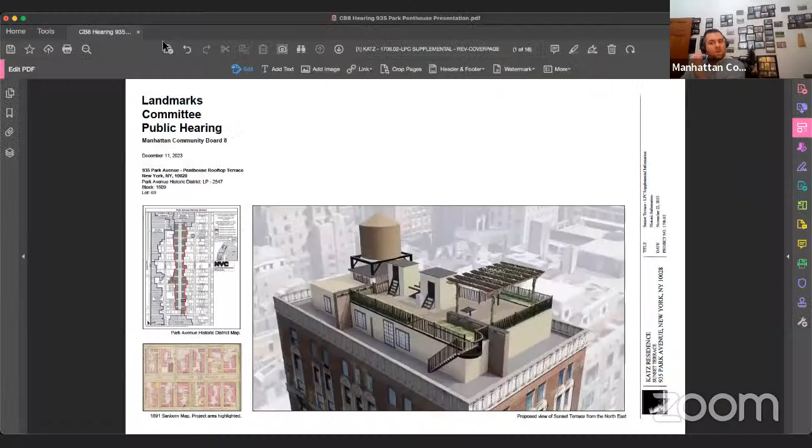Can everybody see? Yes, we can. Thank you, great, thank you. And thank you for your punctuality and precision in getting the meeting underway. We're happy to be back in front of you. I'm Walter Sedovic, the principal of Walter Sedovic Architects.

I'm joined by my partner, Jill Gotthelf. I'll be doing the speaking principally this evening, and we're here representing the owners of the penthouse of 935 Park Avenue, Mr. and Mrs. Katz, Philip and Nancy. I want to start out with a contextual statement.

This is the pergola in its presented proposed form. The simple comment that terraces like this lend a garden effect to the overall design of buildings that front Park Avenue and other avenues like it. You don't have to take my word for that. I'm paraphrasing a quote that appeared in the Herald Tribune in 1930 by the principal of an architectural firm, Schwartz and Gross.

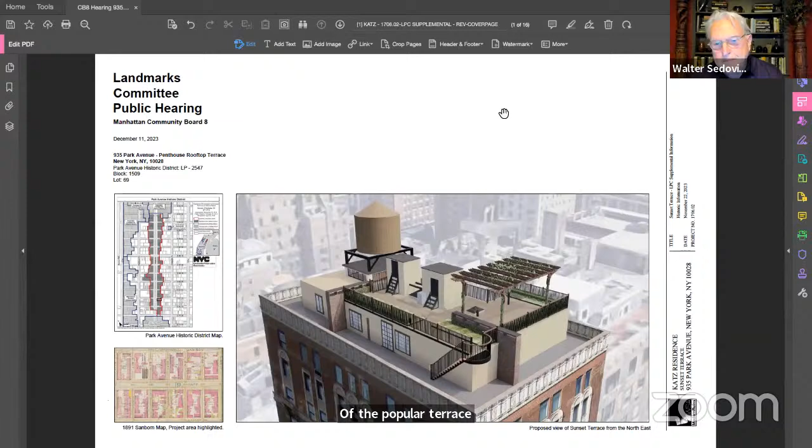That principal, Arthur Gross, made several comments about a law just emerging at that time. In essence, he said that this new law enables us to provide a greater number of setbacks and more expansive use of the popular terrace style of construction on Park Avenue and the avenues fronting Central Park.

These terraces originally were intended to be leafy havens for city dwellers, in keeping with the overarching design ideals that would define singular New York City neighborhoods like Park Avenue, and currently its historic district, that were emerging in the 1920s and 1930s. That is, this form of building enhances the original DNA of Park Avenue.

And there's his quote. The article appears here for your own reading.

In 1891, the most current Sanborn map predating the building, the site is indicated as an open lot. The building, as noted in your summary for this agenda, was constructed in 1923 to 1924 and completed then. It's a majestic building at the corner of 81st and Park Avenue, a phenomenal bookend for this block of buildings.

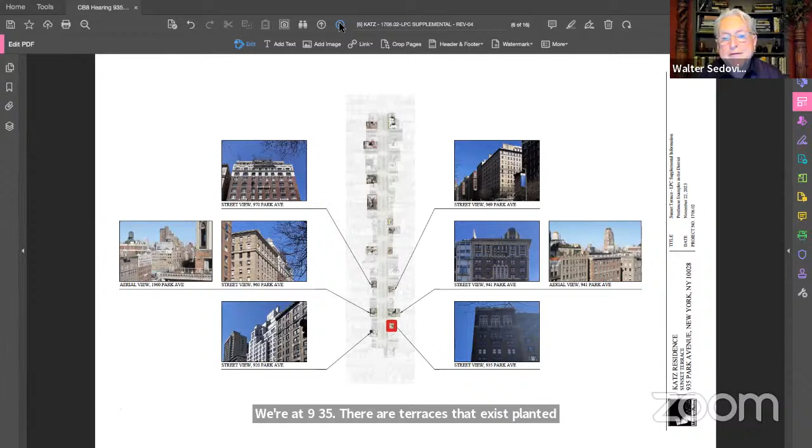however subtle it is. There are numerous terraces up and down Park Avenue, but on our block alone, we're at 935. There are planted terraces that exist at 969 Park Avenue, 941 on the other side of the street, at 930 Park, 960, and also 970.

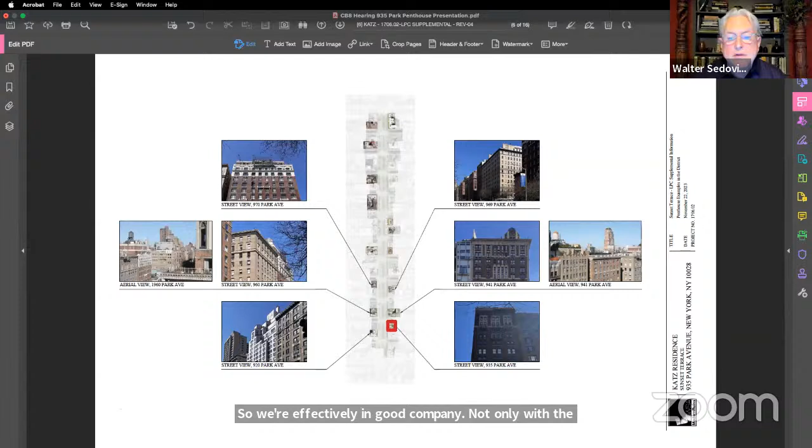So we're effectively in good company, not only with the development of this planted pergola and terrace, but with its scale and mode.

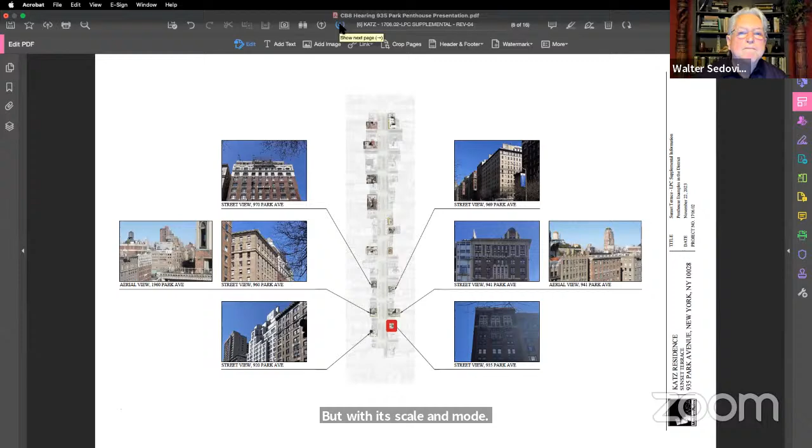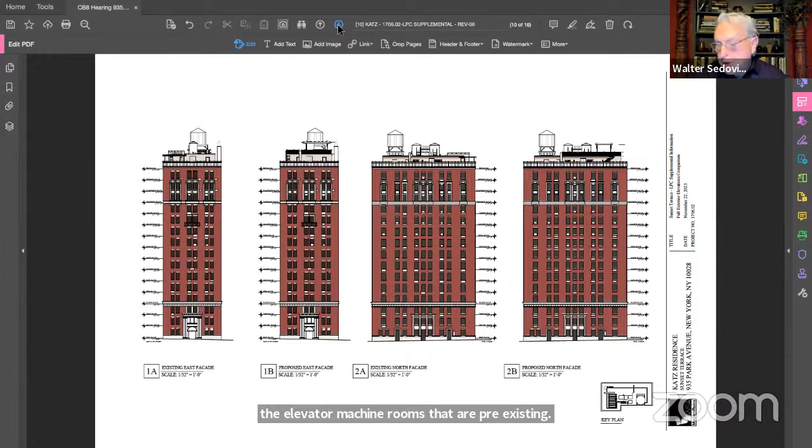On the north facade, similarly, we show the water tower, the elevator machine rooms that are pre-existing, and the interposition of a new rail and the pergola in the upper right in the last view.

These are views from the secondary facades, the west and the south, which are not inconsequential, but you really can't see them from virtually anywhere.

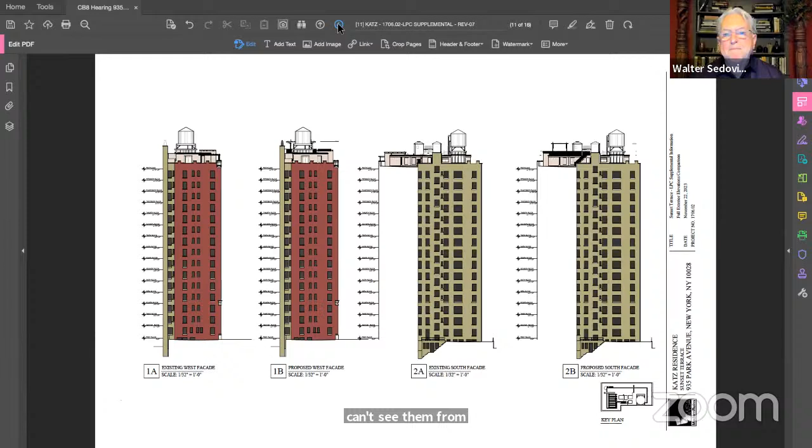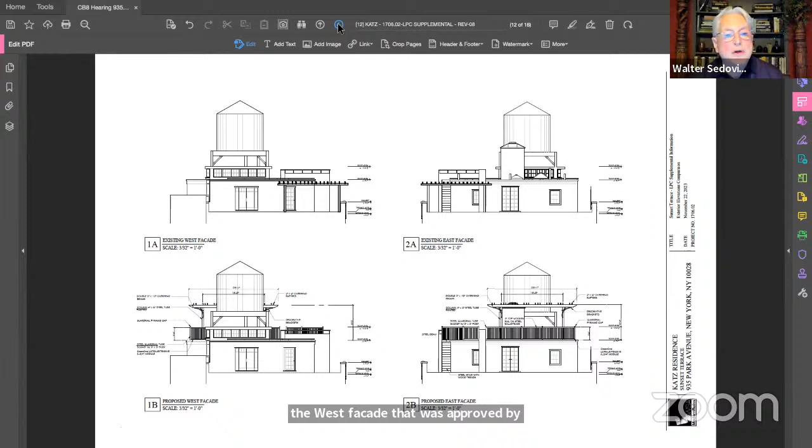And delineated views, a little more detail and closer up, showing the arrangement of the west facade as it exists. And thankfully, we have an extension in the west facade that was approved by this community board a number of years ago that has turned into a very successful and beautiful project.

So the expanded version of the rails on either side, and likewise on the east facade, shows the arrangement on the north facade, which has effectively the pedestrian stair.

On the flip side, we've exchanged a ship's ladder that hugs the wall for a stringer and stair for the specific purpose of maintaining the rooftop equipment. That's separated in essence from the more pedestrian areas of the pergola, which you'll see in a moment.

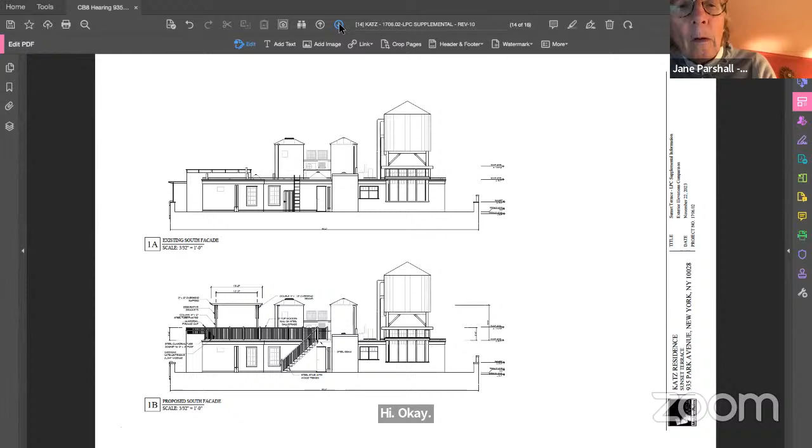I get it. And how high is that rail? 42 inches high, and the balusters are at 4 inches on center. Those two dimensions are regulated for safety purposes, so that a child's head can't get stuck between the balusters. And the pergola itself, the height to the underside is 10 feet.

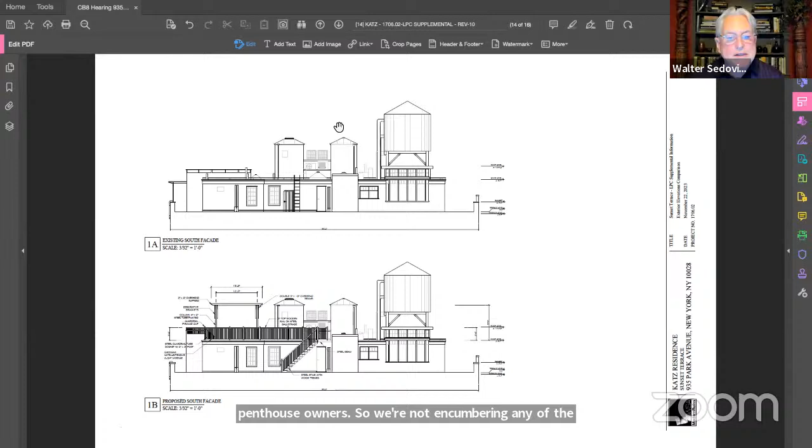And the pergola is going to be on the new terrace, which is formerly the roof. That's correct. And the roof is under the jurisdiction of the penthouse owners, so we're not encumbering any other real estate relative to the building on the whole. This is all part and parcel to the penthouse. And it lands on the existing terrace, which also belongs solely to the penthouse. But right now, that proposed new terrace is actually part of the roof of the building, and the penthouse owner owns that part of the roof. That's correct.

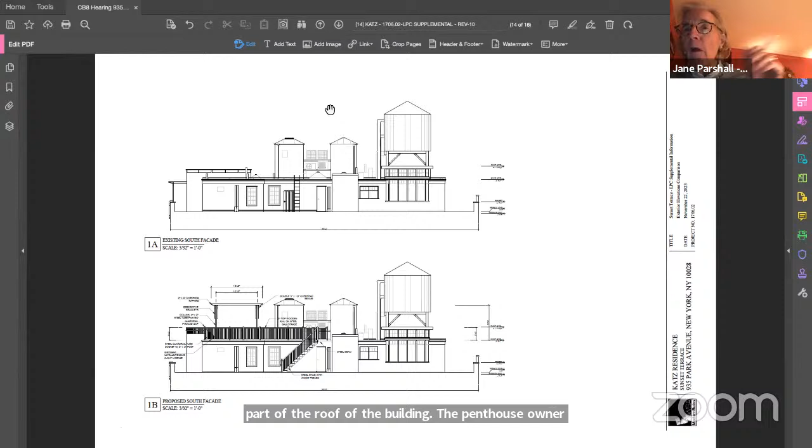And the pergola, what are the dimensions of the pergola? Oh, I see it right there. It's approximately 12 feet wide and 16 feet deep, about 10 feet high to the underside... just to backtrack, it's 12 feet high times 12 feet wide, by approximately 16 feet deep, and about 10 feet to the underside of the cross members.

So it's 10 feet high. Yes, okay. Got it.

The rail elements are all steel. The columns for the pergola are steel, to ensure fireproof construction at this level. The cross beams and purlins are wood. The top rail is wood, and the stair treads are wood, although the stringer for the stair treads is steel. So it's a very simple affair in terms of its component parts, very much in keeping with the vocabulary for the rest of the building.

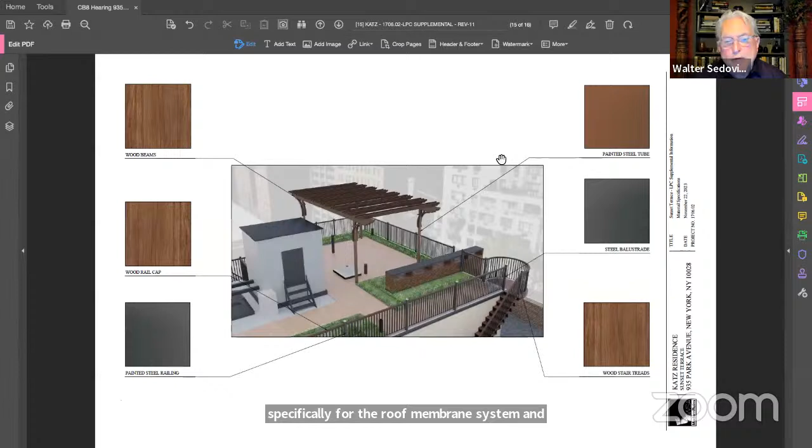The overlay you're looking at, we're providing a new roof membrane for the entirety of the penthouse. These are panelized systems designed specifically for the roof membrane system, and a sedum roof - not grass or anything that has to be cut or manicured, but a sedum mat that's rolled out, lightweight but anchored to the roof. It does several things at once.

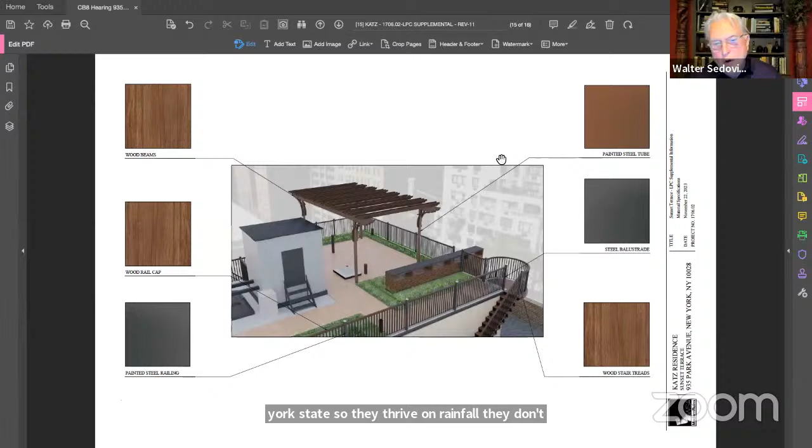The plantings within the sedum mat are indigenous plants to New York State, so they thrive on rainfall. They don't require any fertilizer or additional watering. They lower the temperature of the solar gain on the building, so they're a very fine benefit for heat reduction and enhanced energy performance. And they provide a pretty relief area for people walking up on that area.

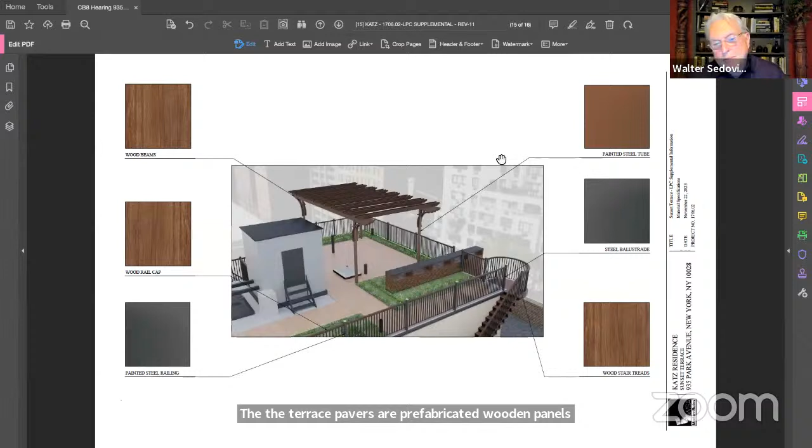The terrace pavers are prefabricated wooden panels that produce the walking paths, and that's effectively it in terms of the materials. Everything grayed out is pre-existing, and this is the arrangement from every view shed.

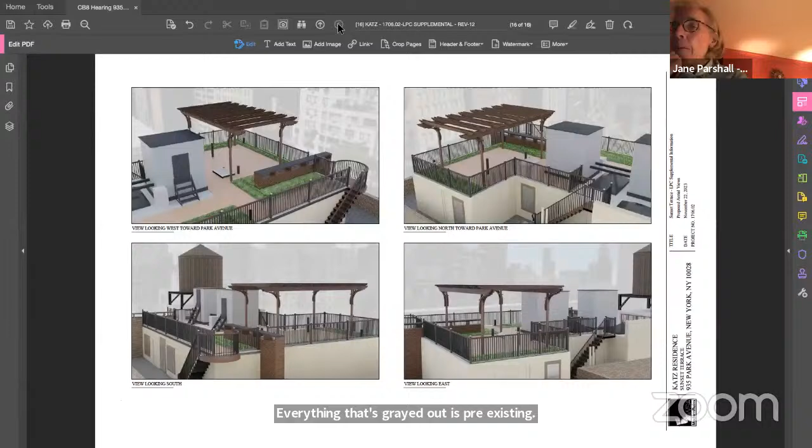Again, sorry to interrupt. Could you just give us the dimensions of the terrace? It does look like it's sort of an L-shaped terrace, is that correct? Yeah, let me go back and show you the plan.

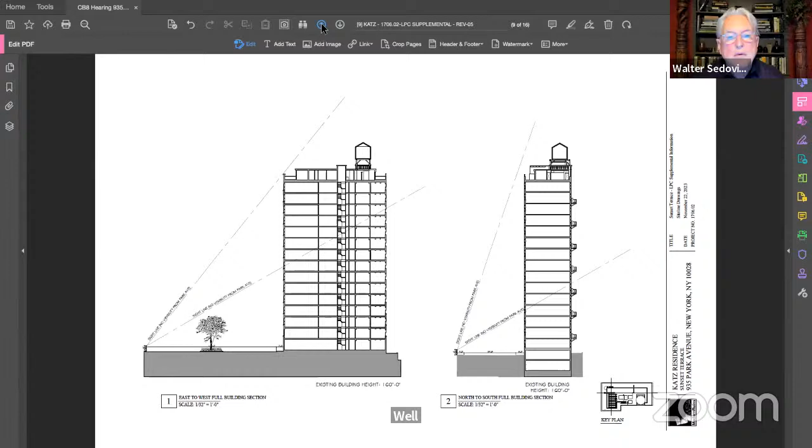That's it. It is L-shaped, all of which currently exists. We're not modifying this in any way. You aren't changing the footprint at all, is that what you're saying? Not one bit. No, the water tower exists - it has always existed in that location.

These are the mechanical machine rooms for the passenger and service elevators, and all other elements of the roof are staying exactly as they currently are, except for that part that will now become a garden terrace. And what are the dimensions of the garden terrace part of the existing rooftop, the proposed garden terrace that will take some of the existing roof to be created?

The areas beyond the pergola to the east and west extend approximately 4 feet, making it about 20 feet from point to point in terms of the rail, east to west. It extends about 4 feet to the south beyond the columns of the pergola, and about 10 feet to the north overall. So it's positioned so there's enough area to comfortably walk around, a gathering space generally oriented to the west for sunsets, although that's not its exclusive purpose.

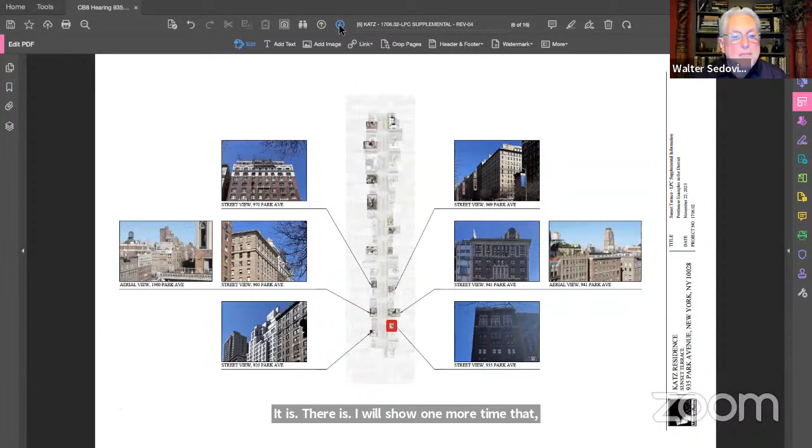And is that your presentation? It is. There is one more thing I'll show. While we don't always seek to make projects like this invisible, it is in fact not visible from the street, with one tiny exception I'll show you. The pre-existing pergola in the northwest corner is being removed. Our pergola is here but can't be seen. I'll show you the one exception where it is somewhat visible, right here. You can see it in our mock-up.

But from the street in the vicinity of the building, it's entirely not visible, only to residents of the penthouse. So it's minimally visible from which point? It's not visible from any point except about a block plus, where you can see the street sign for 80th Street. We're a little south of 80th Street, and it's minimally visible right there, just a little corner of it. Everything else, from every other vantage point, it is not visible at all.

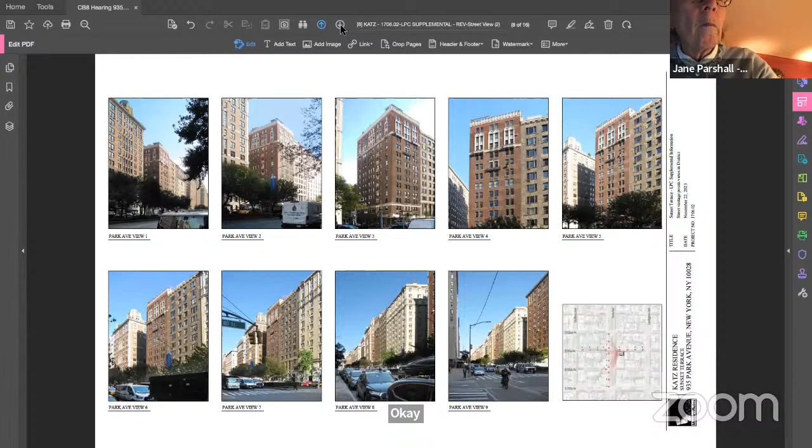Is that your presentation? It is. Okay, very good. Will, could you just check to see whether any members of the public are here?

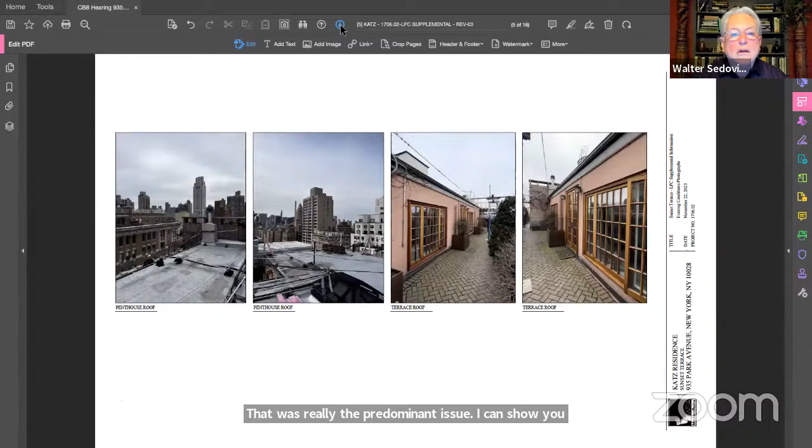I can show you again the location where it's marginally visible, right there. I thought you said that was south of 80th Street. It is south of 80th Street. Okay, thank you, so it's not 81st Street. I thought this was the view from 81. No, that's from below 80th Street - it's about a third of the way down the block between 79th and 80th. Oh, okay, yeah, so it's the south end of the building towards Park Avenue. That's correct, yeah.

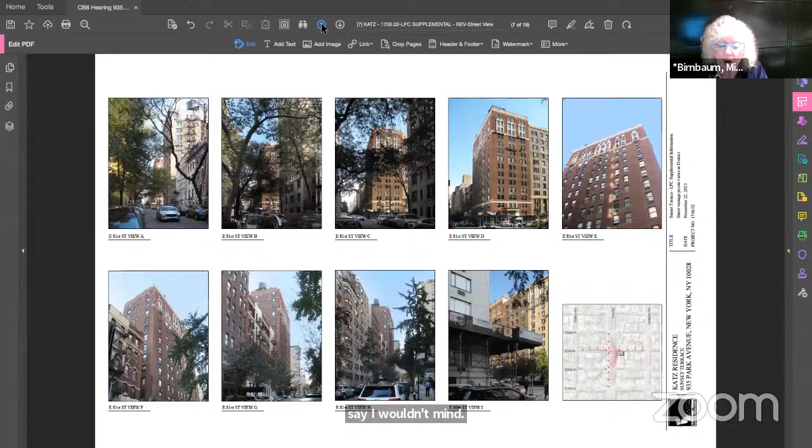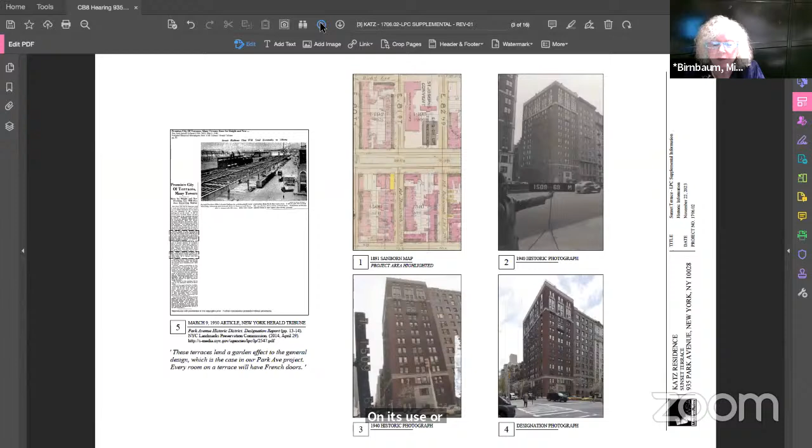I don't have a real objection to it, but I have to say I wouldn't mind - 10 feet is rather high. And if it went to 8 or 9 feet, I don't think it would have a negative impact on its use or aesthetics as viewed from the roof itself, and yet it would bring it down a couple of feet to make it less visible. In the state that it is now, where it is very, very sparsely planted, that probably will not be the case as the years go by. I imagine this will be covered with ivy, both going up and down the support poles and across the roof, and to that extent, it will present as an almost solid structure. So that being the case, which I believe it will be, I would recommend that this be shorter. I don't know how that's going to affect my vote, but that would be my concern.

I have one other question. The partition that you have between the north end of the pergola's empty space - you have sort of like a low stone ridge or brick ridge, on the other side of which is a grassy-like substance. That looks like it's open. Is that a grill or anything, or just a partition wall? You're very perceptive - that's a pre-existing early flue, but it's largely inactive. But it will remain? Yes. Okay, remain and not be used. Correct. Okay, anyway, that's my suggestion. Thank you very much. Well, thank you very much.

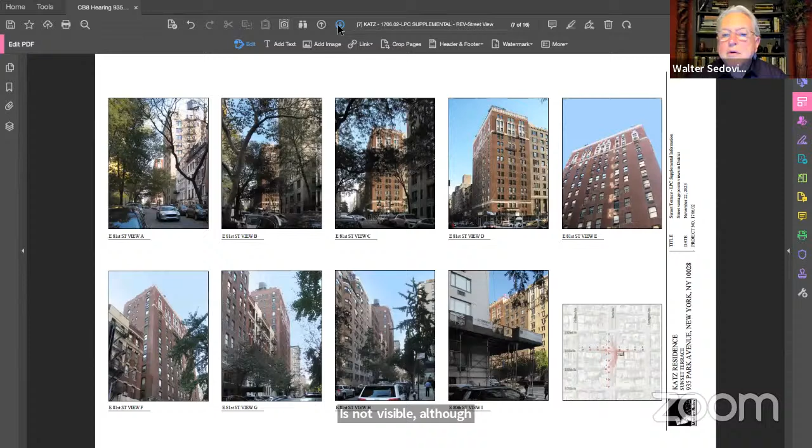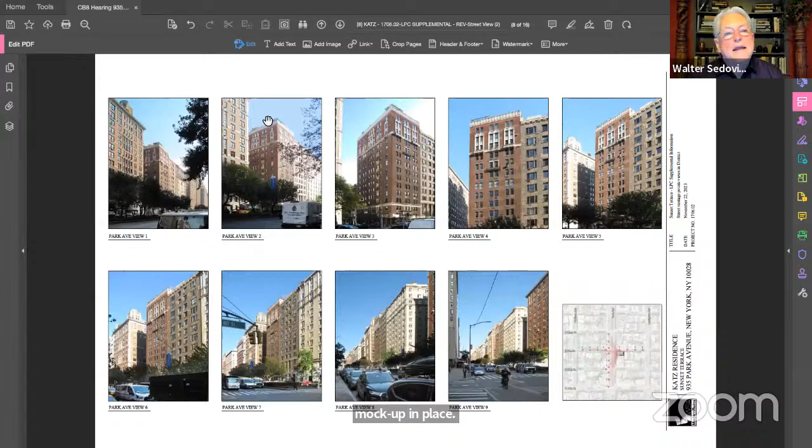Again, what we're looking at in the inside corner is a pre-existing pergola that will be disassembled, but there is nothing else that's visible from that perspective, even several blocks away. The curve of the stair is actually included in the mock-up that's in place right now, so the entire railing is mocked up as well as the pergola.

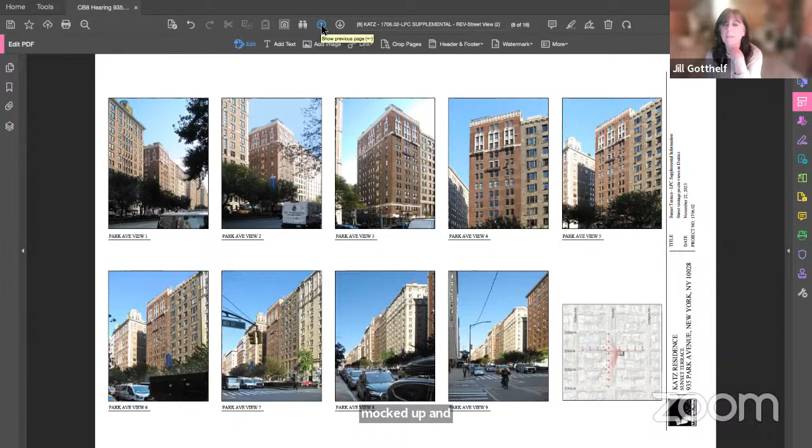Okay, that's the lower line in those places where we can see it. Exactly, the railing is mocked up. Got it. And the pergola. So absolutely everything is mocked up, the full extent of it, so that you could clearly see everything. Okay, thank you.

Alita, did you have a follow-up question? I did, thank you. Is there any chance that when the pre-existing pergola comes down, something would be visible that's not necessarily visible now because it's blocked?

Is there a chance? I would hesitate to say that there is no chance. However, we're not the only set of eyes that were looking at this when the mock-up was in place, and nobody was able to view a glimpse. That is to say, the staff at Landmarks were not able to view a glimpse of that pink frame through the pergola. The pergola wasn't entirely blocking the view.

You could see through it at the time the mock-up was in place. The mock-up is still in place. The pergola right now, the lower pergola, is not heavily planted, so visibility is there.

The top of the pergola aligns with the bottom of the platform of that curved stair coming through, so the existing mock-up of the railing of that curve is above the rooftop of that pergola. So when the pergola comes down, you would see, if you saw anything, it would be the corner of the pre-existing penthouse where the pergola is, because the railing and the curve right now are above the top of the existing pergola and are mocked up above the top of it.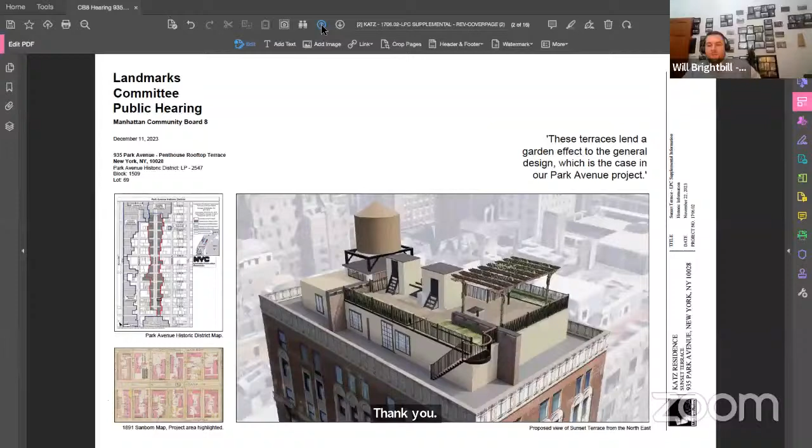Thank you. Thank you for the presentation. Let me start.

Basically, the scope of work is the railing and the relocation of the pergola. It's a very simple application. The problem is that you tried to enhance your presentation and went beyond that, and that probably doesn't help you at all. That's my impression.

How tall is the building, or how many stories? It's 16 stories plus the penthouse. So basically, people start looking 160 or 170 feet up to determine that the pergola is too high. I think that's unfair against you, because at that height it's impossible to determine if the height is well proportioned or not.

However, I'm going to ask the question: what determined the height of the pergola? What was your analysis or point of view to propose 10 feet?

It really came down to proportions of the size of the pergola and the comfort of standing underneath it. At the lower height, when asked to come down to 8 feet to the underside, for a space on a terrace, given the proportions of the pergola and its members, it felt very top heavy and enclosed, as opposed to a pergola, which is supposed to be open to garden and air. Bringing it up to 10 feet proportionately worked with the size of the rafters and the comfort of standing within it. Thank you.

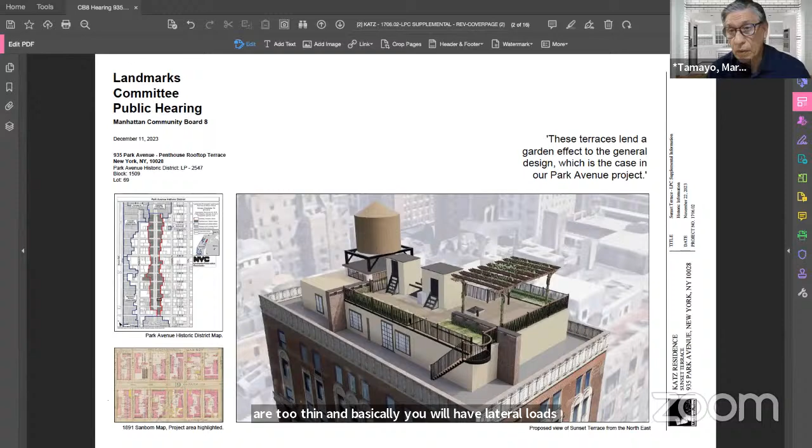I think the only thing I'll comment on, if possible, is just the dimensions of the column. The higher the column, the moment of inertia increases, and basically you have structural problems. Looking at the graphic, these columns look too thin, and you'll have lateral loads to deal with. In any event, you are responsible, it's your decision, it's your design. I find this is a very simple application. I do not have a problem.

Thank you. Thank you, Mr. Tamayo.

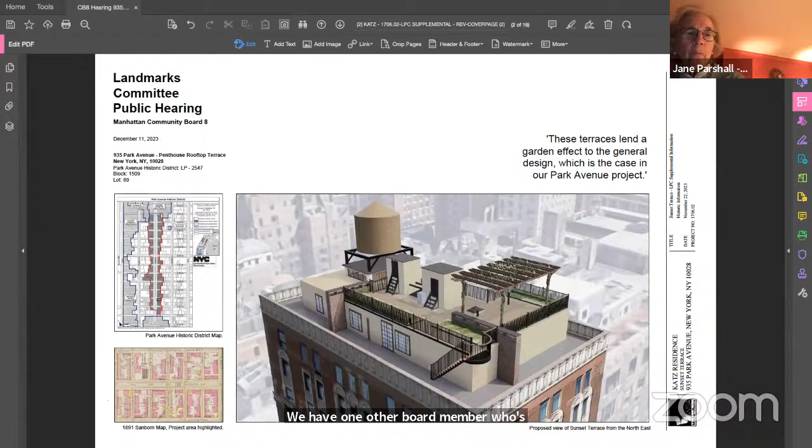Thank you for the presentation, very well done. The only thing I would echo is what was said earlier—I would have preferred if the height of the pergola were a little lower so that it was not visible from the street level. Otherwise I think it's a very nice rendering and well done.

Thank you, thank you very much, Ms. Parshall. Oh, Michelle, is this a follow-up point? Yes, okay.

I just wanted to clarify that the district was declared in 2014, so that puts some context there for you. The other point is that the height of 10 feet is to the underside of the roof of the pergola. So it looks very thin, but we don't have the dimension—is that a couple of inches or a foot? You can't really tell from here. I'm not sure how much additional height there is, since the 10 feet is to the underside. I think it's a little too high.

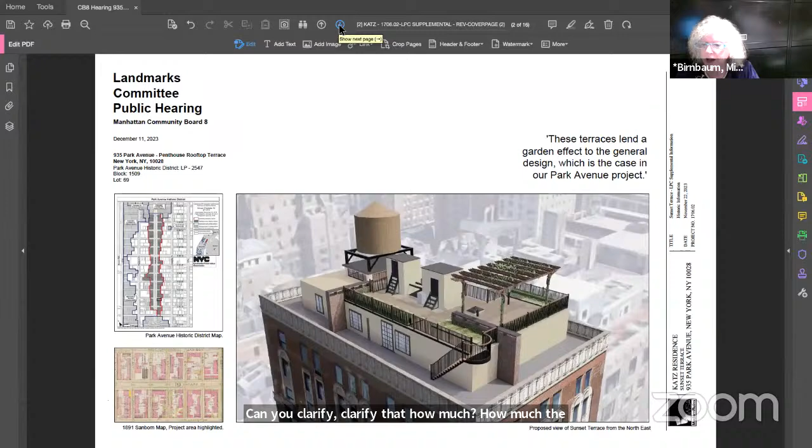Can you clarify how much the actual roof adds to the height? Let's have a look and see if I can find that.

This might help. The 10.6 is to—if you go down, Walter—the 10.6 is to the top of the main structural elements, just below the upper purlin. So the 10.6 is to the top of the larger structural members. The small purlins sit on top of that, and I believe the rafters are 2 by... well, those wider rafters—the 10.6 is to the top of those. So how wide are the rafters? I think that's the question.

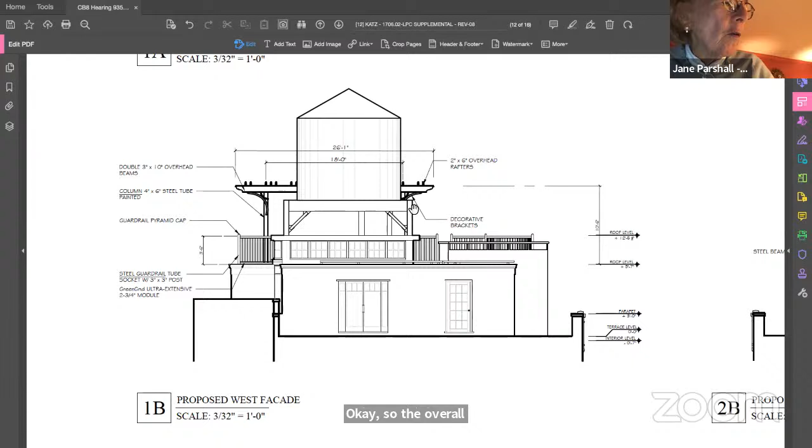Oh okay, so the overall height is 10.5 feet, 6 inches—correct? Yes. So it's 6 inches above for the open lattice rafters. Well, let me just sum up. Thank you, no, I understand. So it's 10.5 feet—let me reaffirm what I said earlier.

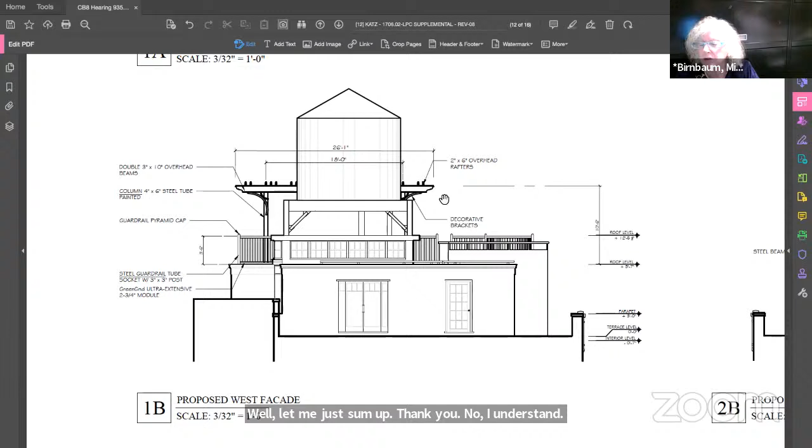When this gets fully planted out, it will present higher than what we're looking at in your graphic. It's very scantily planted now, but that won't be the case over the years. I would hope it wouldn't change the functionality or the pleasure and enjoyment for your clients if this came down about 2 feet, giving them 8.5 feet to the top of the roof. I'm not telling you how to design, but I think that would be more comfortable, because it will still be visible. As you said, what's visible now is 4.5 to 5 feet. If you bring it down, it's going to be visible 2.5 to 3 feet, which is significant.

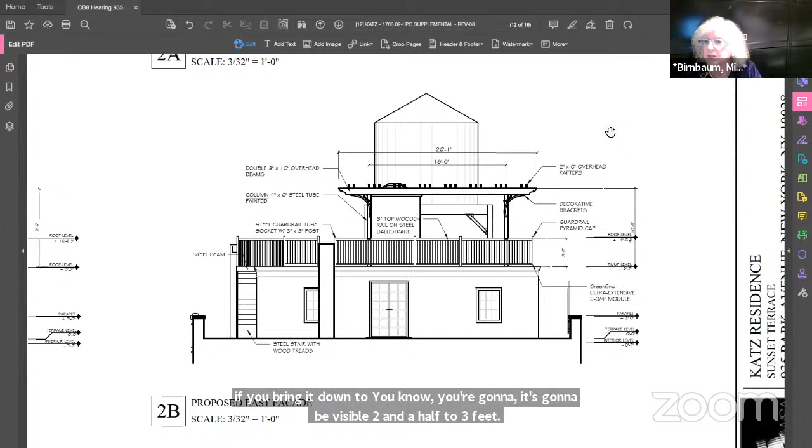Especially since the color will not blend in, because it will be greenery or flowers or whatever you're proposing for the paint of the support beams. So I would like to see it lower.

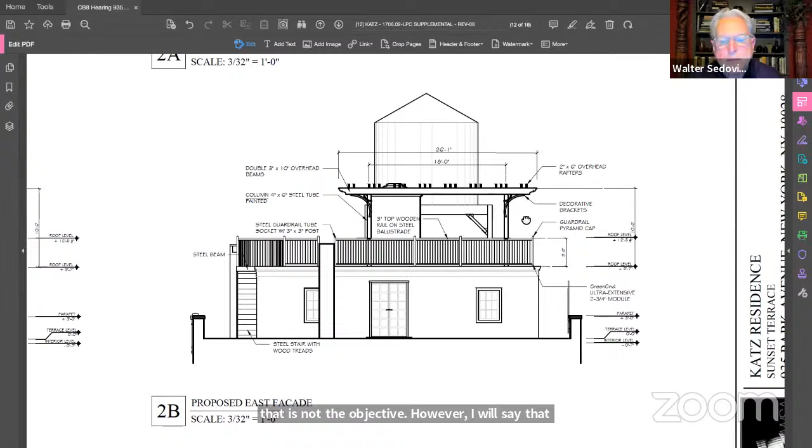Thank you. I should clarify a few things. I understand exactly what you're suggesting about the ability to plant the pergola to excess, or if it were planted with something like wisteria that has a tendency to grow in abundance—even though it drops its flowers down, it still grows upward. We're in total agreement there. However, I will say that is not the objective. The objective is not to overly plant the pergola. I just want to make that point very clear. So this isn't somehow a surreptitious move.

The second thing has to do with the height. I think we could certainly discuss with ease and comfort lowering the overall height of the pergola, but I'm afraid we wouldn't get into the realm of 2 feet, because in the scheme of walking under this, even for a person approaching 6 feet, that's going to put the beams just slightly above one's head, which I think would defeat the purpose of the exuberance intended for being up on the roof with something of a shelter surrounding you, or at least a defining moment that people can gather under. Things start to feel very close very quickly, as you probably know from being in pavilions or other outdoor venues that are either too tall or too tight, too short.

We did go through a study where this was actually taller, so we brought it back down significantly. It was smaller, closer to the ground, and we moved it back up again because there is a distinct lack of comfort at some point that we all can feel and recognize. I'm not sure where that sweet spot might be to take into account your comments, which I think are very thoughtful. We would certainly be very pleased to look at the objective of lowering the height of this. I do want to point out, though—

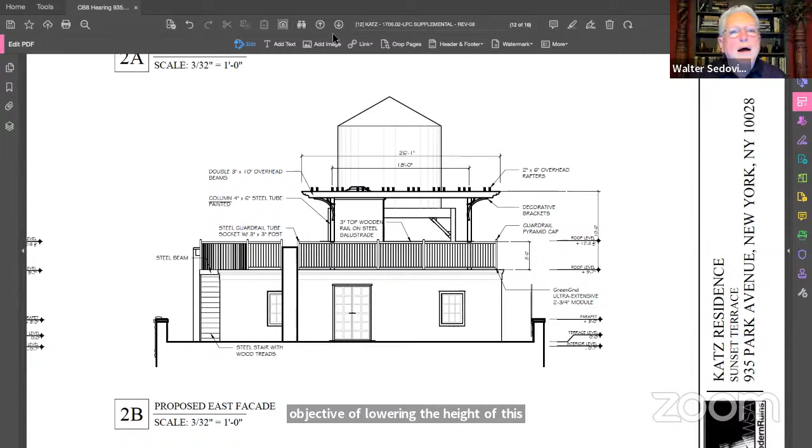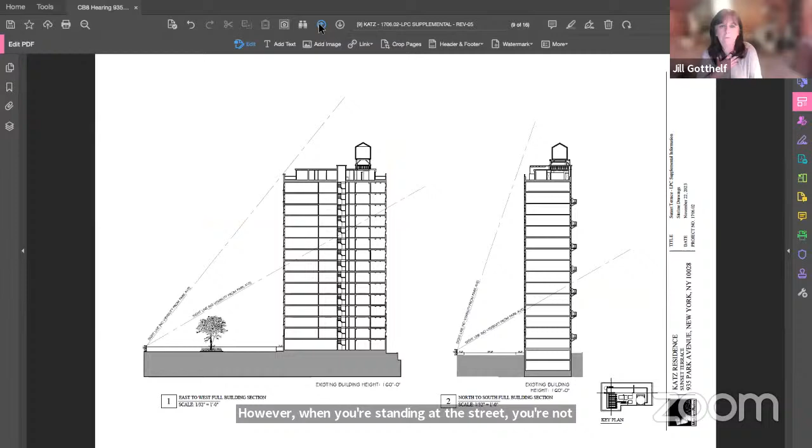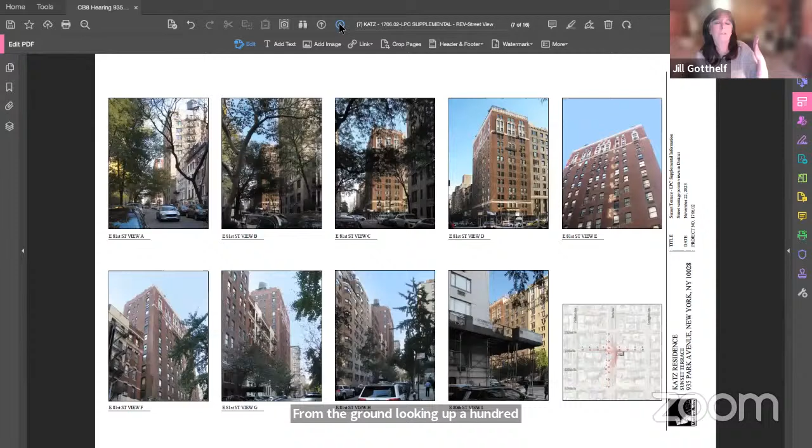Let me just get back—well, before you leave there, I did just want to say, where Walter mentioned 4 feet, there's 4 feet from the top of the rail to the pergola. However, when you're standing at the street, you're not seeing a flat 4 feet sticking up above the roof, because you're looking at it in perspective from the ground, looking up over 100 feet in the air. So you're not actually seeing a flat 4 feet distance as you're thinking of 4 feet—you're seeing a corner of it in perspective. It goes to a height of 4 feet above the rail, but the area you're seeing is not a straight flat 4 feet distance.

Thank you, Jill. I think we're going to go now to David Halpern.

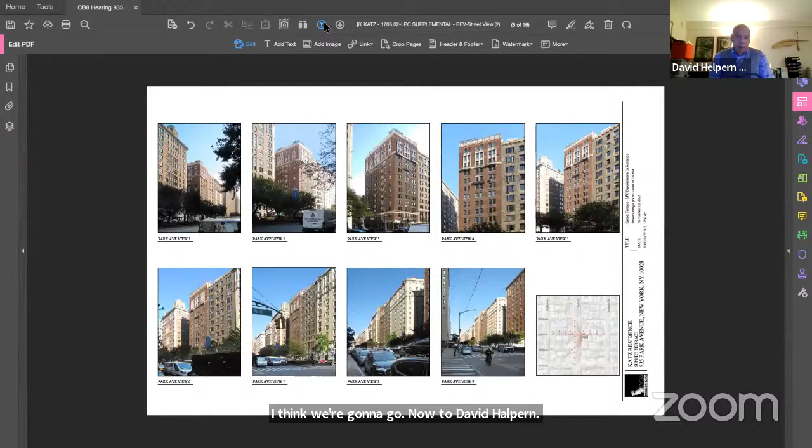My feeling is that the height of the pergola is appropriate. I think to drop it a foot, it would still be okay. I don't think it's going to be significant in terms of what you're going to see and not see from the street. We have to vote on this as presented, unless they want to commit tonight to making it 9.6 instead of 10.6. But as presented, I think the proportions are fine. The amount of visibility is not great, and I have no problem supporting this.

It's thought out, and as far as I can tell, a reasonable solution. Thank you, David. I concur with David—I think we're quibbling over the height. This isn't a solid structure, it's a pergola, so it does have a lot of transparency.

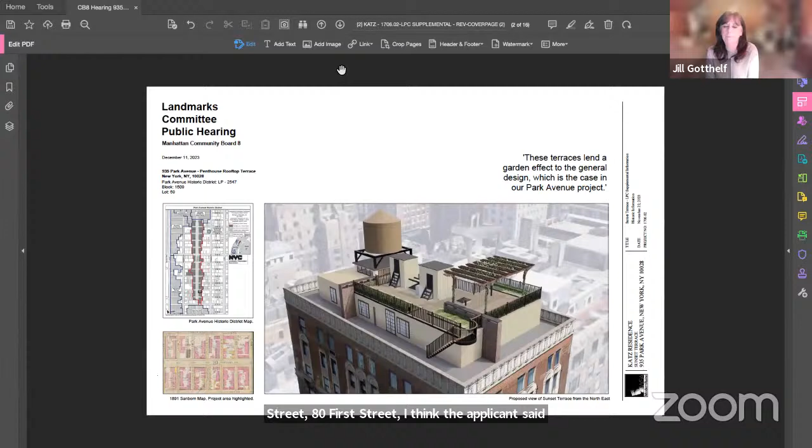And as the applicant said, it's very minimally visible only from one vantage point, south on 81st Street. I think that actually having some greenery there, even if it is minimal greenery, would be lovely.

And I feel very strongly that we should support the application as presented. I think lowering the height makes it, as the applicant said, slightly claustrophobic for the people who might be gathering underneath it. But you want some airiness to it, it's a garden structure. So I would support the application.

And David made some very good points as well. Thank you. So does somebody want to introduce a resolution? You have several hands up.

Elizabeth Ashby, first up. Yes, I just wanted to comment, and I will make a resolution to save other people. I think that the pergola should not be reduced. I know people are thinking about whether you see a corner of it from the street. I don't think we want to make it look squat. And I think that taking it down, as a couple of other people have said, will make it look unattractive and squat. You probably could shave off an inch or two here and there, but I think it's more attractive as it is now. And I would like to make a motion to approve this application.

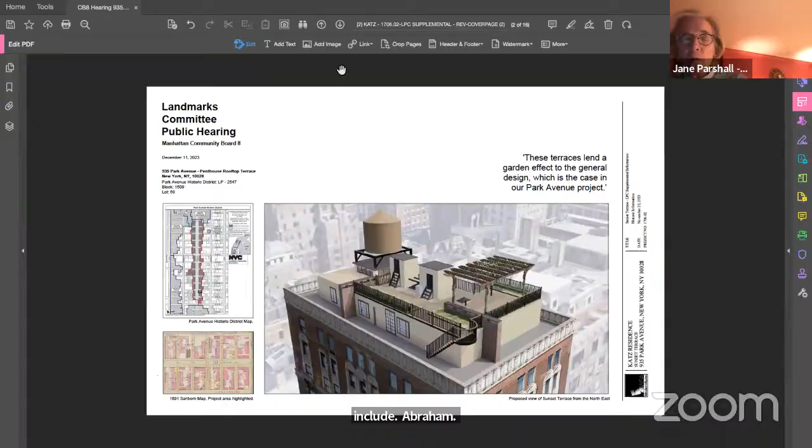Thank you. Is there a second? Yeah, Marco Tamayo. Thank you. So I think we can go to a roll call and be sure to include Abraham. All right, I will, since I don't think he's on our regular vote sheet. He is not. Gail, did you have a quick question while I pull up the vote sheet?

Gail Barron. I do not, I was just trying to lower my hand, which doesn't want to lower. All right, okay. I hope you are all seeing the vote sheet now. Let's believe that that's true.

So, starting with Elizabeth Ashby, yes. Gail Barron, yes. Michelle Birnbaum, yes. Alita Camp, pass. Okay, Sarah Chu is not here, unless she's just snuck in. Nope, okay. Anthony Cohn, yes. David Halpern, yes. Jane Parshall, yes. Marco Tamayo, yes. Christina Davis is not here. Kim, yes, thank you. John left and Abraham, yes. Beautiful.

All right, going back to the pass, Alita Camp. Well, I do think it should be shorter, but I'll just say yes anyway, I guess. Thank you, we'll see what happens Wednesday.

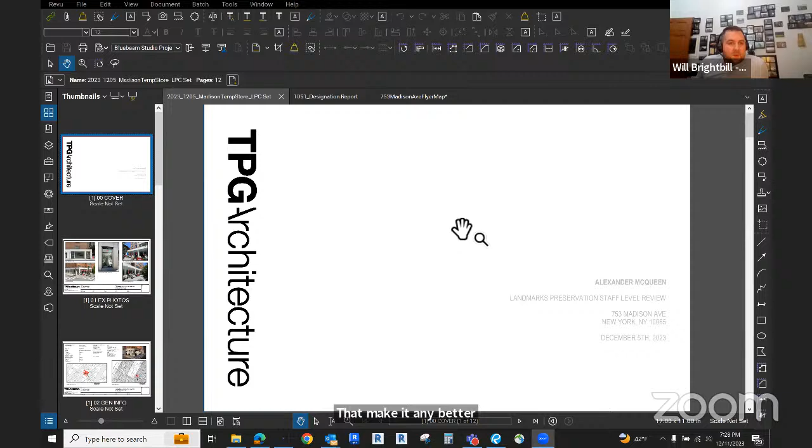Can everyone see? If you want to go into full screen mode, it may be a little easier for everyone to see. Oh, okay, hold on. Stop share for a second. That make it any better? No, that's still the same, but I don't want to take everyone's valuable time on that.

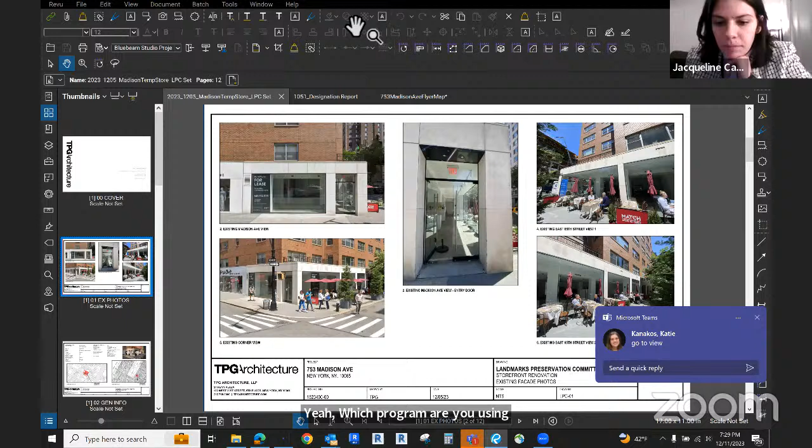Well, it's not proper, at least on my screen. Okay, yeah, well I have a corner of it, so let's try to get it correctly. Yeah. Which program are you using? I'm in Bluebeam. Oh wait, yeah, view and then, oh wait, I think actually it's window. This guy, yeah, there you go. Okay, that's much easier to read, but you can still make it a little larger and it would be helpful.

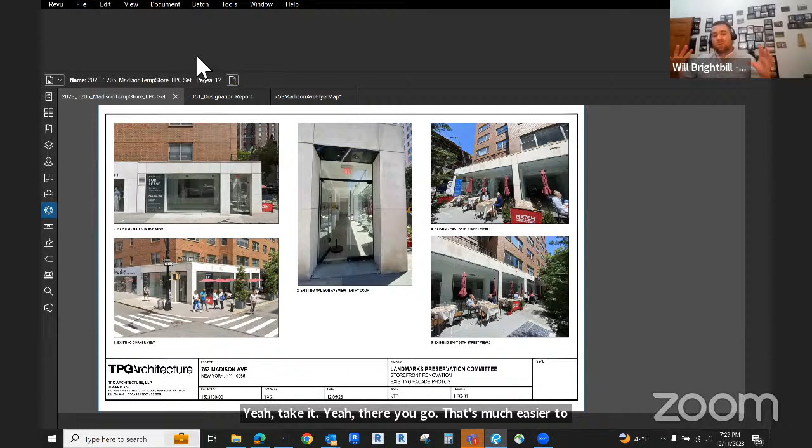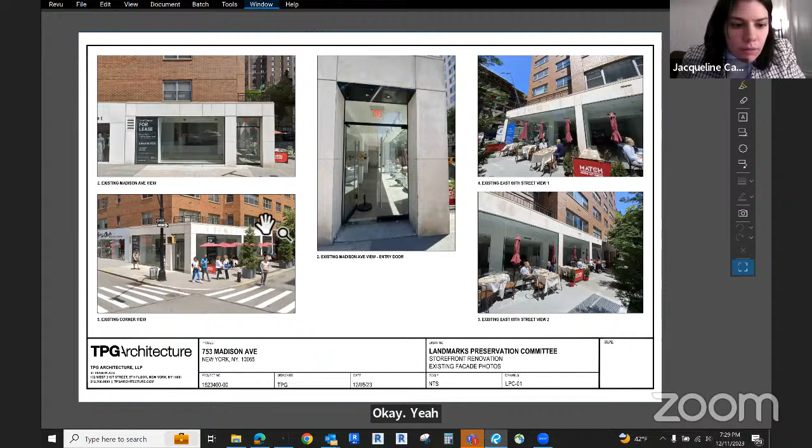I think it just took a second to load. Okay, is that getting a little better? Okay, a lot better. I'm actually gonna do...

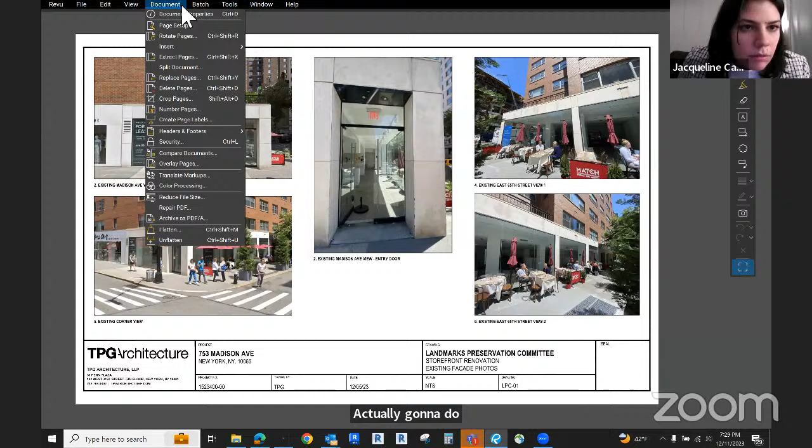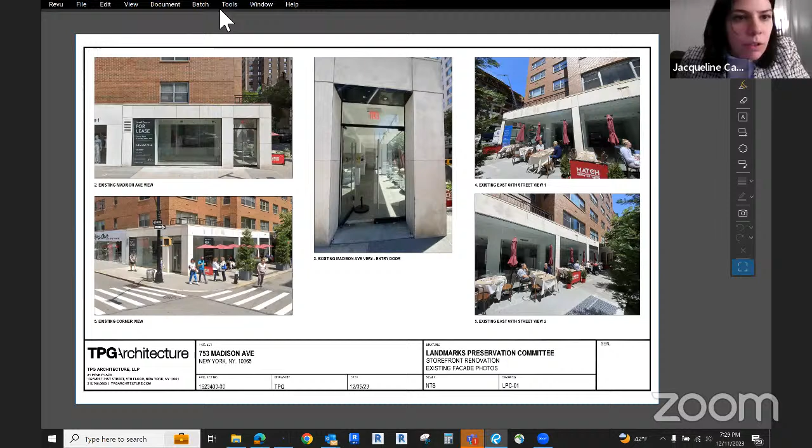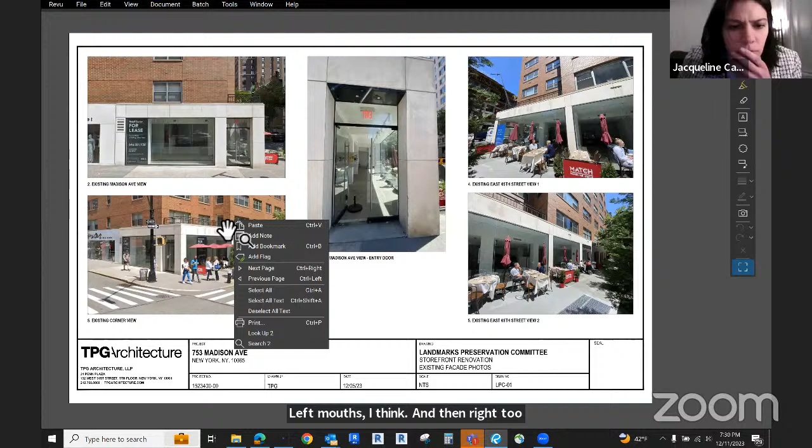Katie, sorry, how do you, when you're in full screen, how do you tab to go to the next page? Because now my arrows are gone. Left mouse button, I think. And then, oh right, look, takes you back. Oh, I think it's because I did full screen, not presentation. Yes, if you go back to window and hit presentation, I think is the one you might want. There we go. Okay, yep.

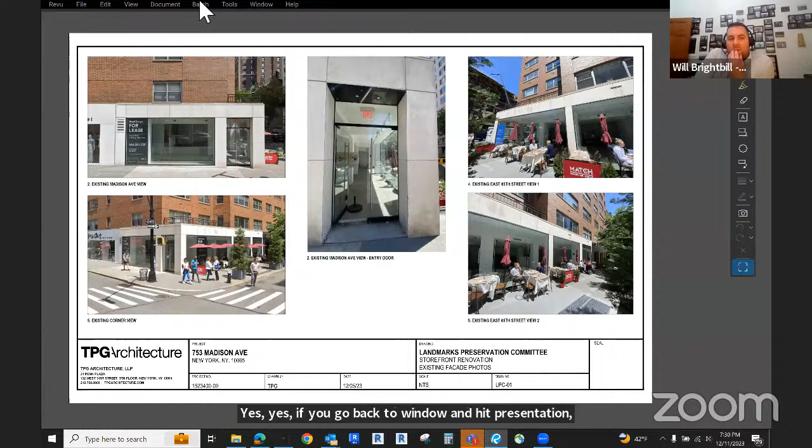There we go. Okay, sorry. That's so much better. Minor difficulties.

My name is Jacqueline Ca, and I am a project manager at TPG Architecture. We are working with Alexander McQueen on their upcoming project at 753 Madison Avenue.

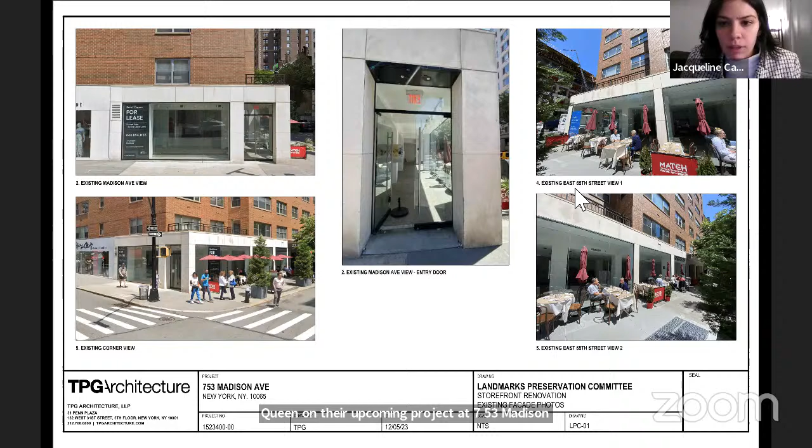These are a few views of the exterior of the building today, and this is the map of where we're located on 753 Madison Avenue.

Just a little background on Alexander McQueen. The House of Alexander McQueen is a renowned British fashion brand that was founded in 1992, known for its innovative and uncompromising creativity and respect for time-honored craftsmanship.

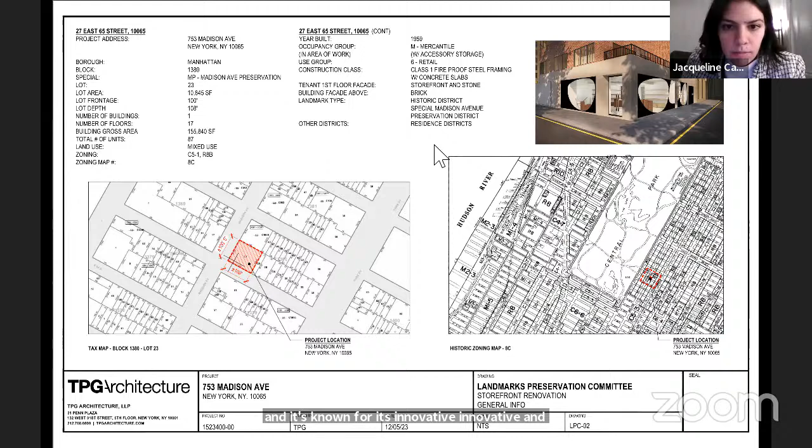Alexander McQueen has an existing store location at 747 Madison Avenue. It's actually located right here, and they are in the process of temporarily relocating to the corner location of 753 Madison Avenue, right on this corner here. The store will act only as a temporary location while Alexander McQueen designs a larger store further down on Madison Avenue.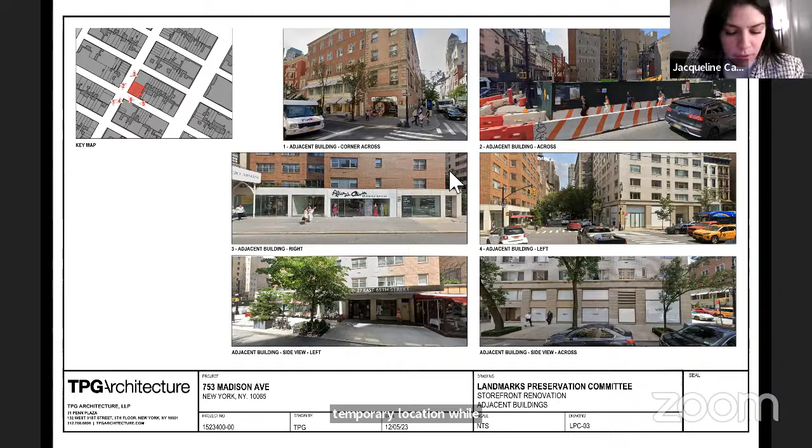Alexander McQueen has secured their new lease of 753 Madison Avenue space and are currently in construction, with an opening date for end of this month. The brand is kindly requesting to install brand-inspired graphics on the exterior storefront windows.

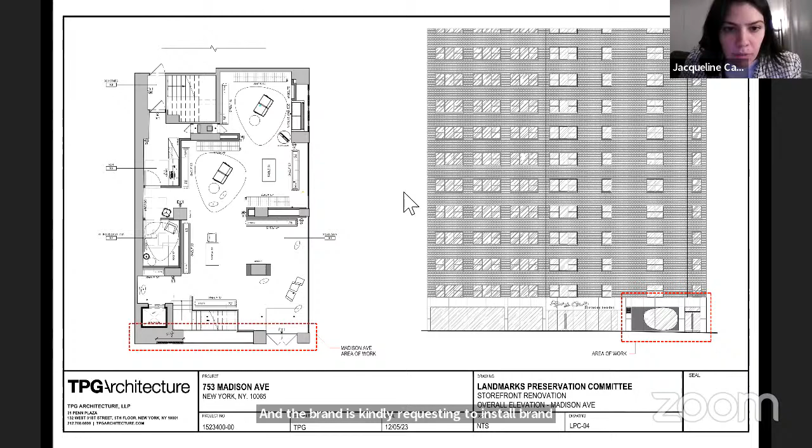I'm just going to flip a few slides over so you can see the full renderings. These are the graphics. They are designed with creative and organic shapes meant to lure customers into the store with its compelling design appeal.

As you can see, the majority of the storefront windows are minimally covered, which still provide full views into the space. There are only two areas of the storefront in which Alexander McQueen is requesting to conceal the full window, in the front here and the side here.

This is due to the fact that the view into the space in these areas is already being concealed by other interior elements. On the front facade, there's a small portion of glazing here that is currently being concealed by an existing interior wall behind the glazing.

On the side facade, due to the limited amount of solid wall space throughout the sales area, the back of one of the brand's essential millwork display shelves would have been exposed to the public eye. So Alexander McQueen has proposed to cover these two areas with full height graphics as a design solution to shield the customer's sight from any unappealing views.

So I'll go back to the full graphics once again. On the sides here and here, you can still see fully into the store, and it's just this window here and this window here on the end that are being fully covered. As this is a temporary store location, these graphics will only remain in place for the duration of the store's lifespan.

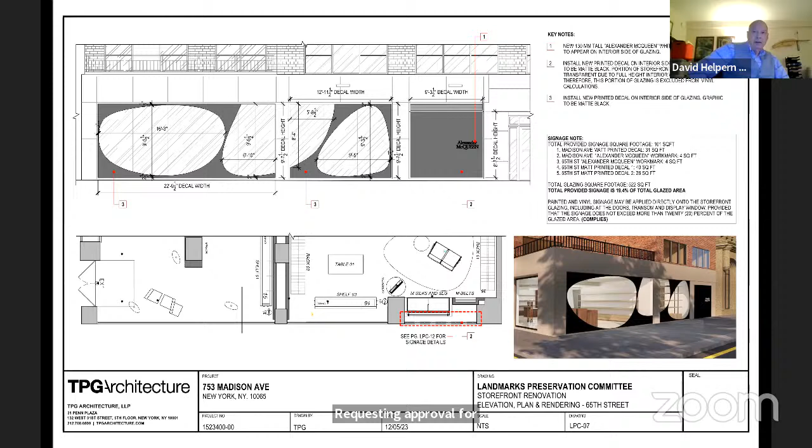And this is a temporary location, correct? Yes, it is. How long? We anticipate them to be there for approximately a year, and then they have a larger location further down at 600 Madison that they'll be opening.

To the other one, this is the front. All right, thank you. If that's the presentation, it's fairly straightforward.

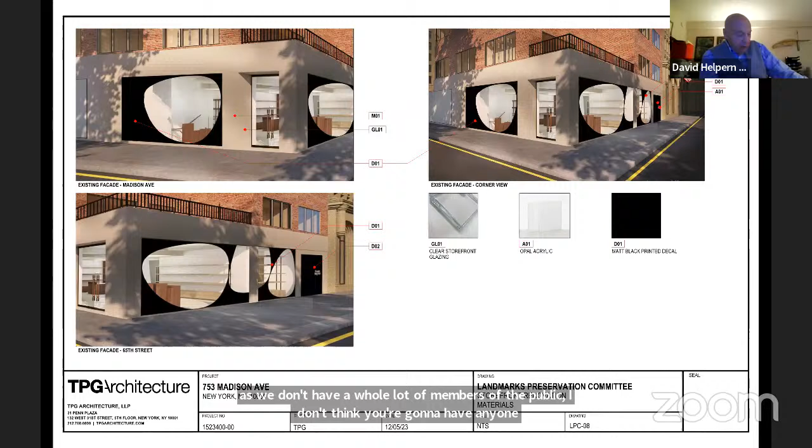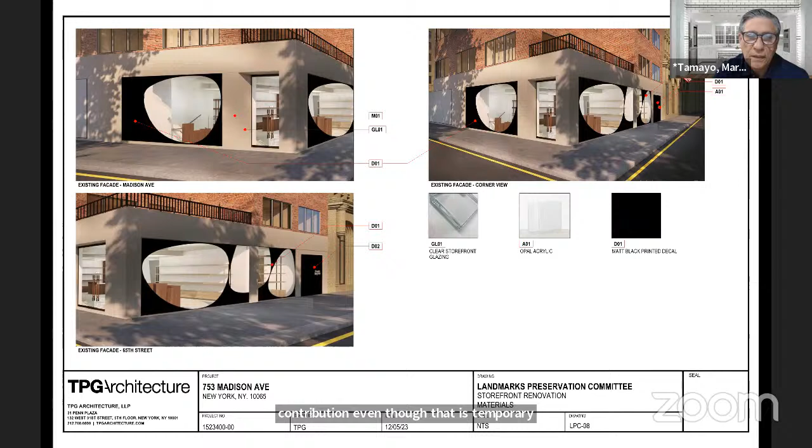Thank you, and thank you for the presentation, very short. Thank you. Thank you very much. All right, thanks, Marco. We're going to move up to Anthony Cohn.

Anthony, I'm here. I thought you were going to get to Abraham first, so I wasn't ready to hit my unmute. It's temporary. It's fine. I think the temporary quality of it kind of removes any questions that someone might have. I'm not even sure if I have any.

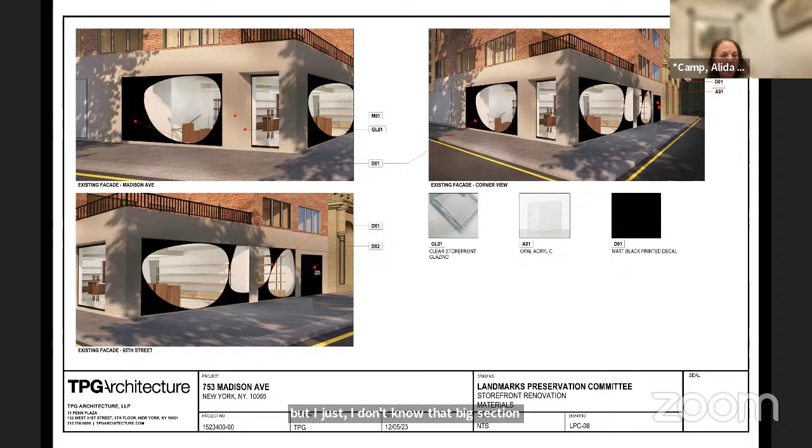I went to the Alexander McQueen exhibit at the Met, and the level of craftsmanship he exhibited, no pun, was extraordinary. So I'd have to say, in light of that, covering up the window, there must be some other solution. It drags down the block. I like the tension of what you've done, the graphics on the other windows, but that big section of black bothers me. I love walking up and down Madison Avenue — I think I've done it five times in the last week, or been on the bus — but I have a lot of trouble with that. Thank you.

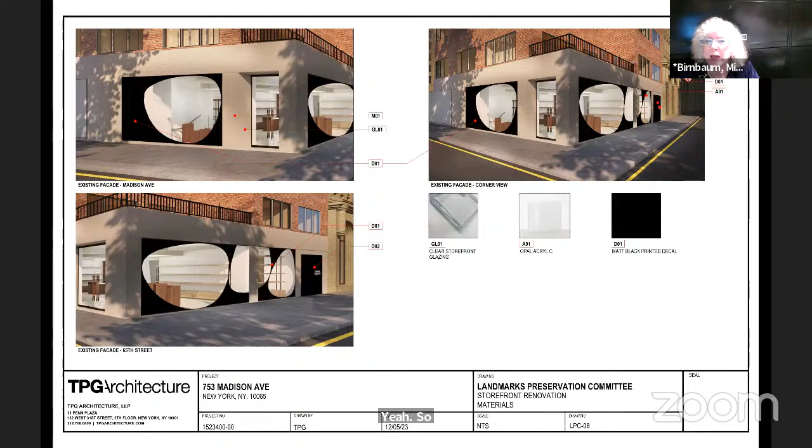Yeah, thank you. You're all better men than I am because I'm not quite sure I'm looking at what I'm looking at, so I have some questions.

Okay, so what you're referring to is the decal — only the black surround, is that correct? Yes, it's a matte black vinyl on the windows. On the exterior of the window? It's mounted on the interior of the window. Okay, so that's the decal. And the irregular biomorphic shapes are the actual glazing, correct? Yes. And so what we're looking at on that glazing is the interior furniture of the store. Yes, without any of the actual merchandise shown — there will be things on the shelves. Okay, I wanted to be sure what that was.

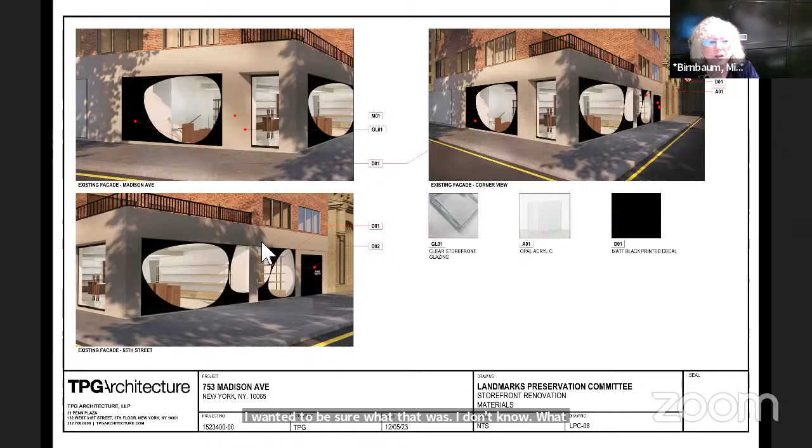What are the dimensions of this, the first one to the left, which seems to be the largest one? This one's actually 13 and a half by 8 by 13. Am I reading 8 by 13? So in the front facade there's an existing wall behind here, that's why they also have the vinyl on this window. No, I'm talking about the dimension of the glazing. So that's 8 — am I reading it right, 8 and a half, 8, 11, almost 9 by 13? Is that right? Correct. Just with — okay, sorry, got it. Is that correct? That's correct. Okay.

I don't see any lighting anywhere, and I don't see any signage, so how are you proposing to afford this location identification? In terms of lighting, there will be kind of lighting set back behind the window that will allow them to show product in those openings, as well as the furniture that you'll see beyond. Interior lighting? I'm sorry, interior lighting. Okay, yep, nothing on the exterior. And then they will be doing some branded graphics and things, but set back from the restrictions of the Landmarks Commission, so you'll be able to see product and branding through the windows.

The branding will be on a sign — will it be bronze, or lettering on the window? I'm curious why isn't that part of this application? I think it's significant. The signage is actually set back a significant distance from the window — there will be metal signs, but they'll be set back a significant distance, not under the jurisdiction of the Landmarks. So you mean they're interior? They're interior, behind the glass, correct. I know a lot happens with interior signage — I'm not saying it'll be the case with yours, but if you go around the city, you see a lot of interior signage that would otherwise break all the rules.

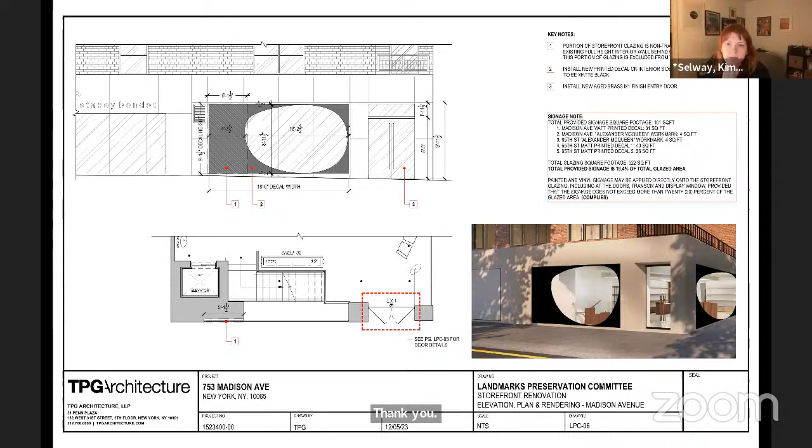Thanks, Elizabeth. Next is Kim Selway. Thank you. I can also support this, not just because it's temporary, but knowing Alexander McQueen's brand identity, this is pretty tame compared to the other iconography. So yeah, thank you for the presentation and for your time.

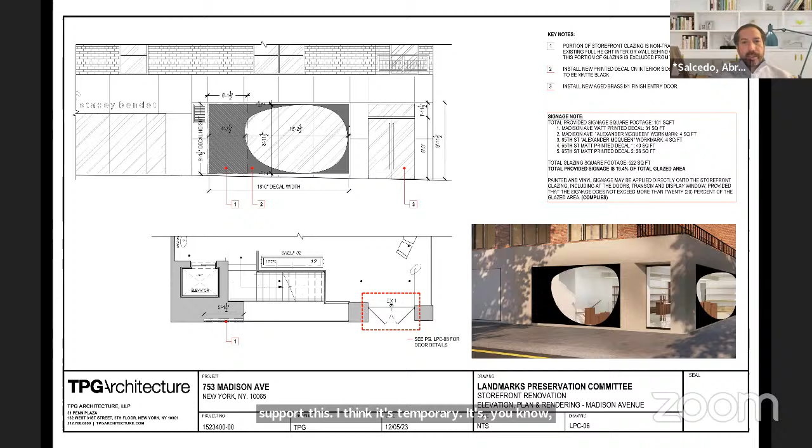Thank you, Kim. And last, Abraham, and then our co-chairs. I can also support this. I think it's temporary. It is the one dark window, which I think in the context of everything else that's being done would be a minimal impact. So I will support this.

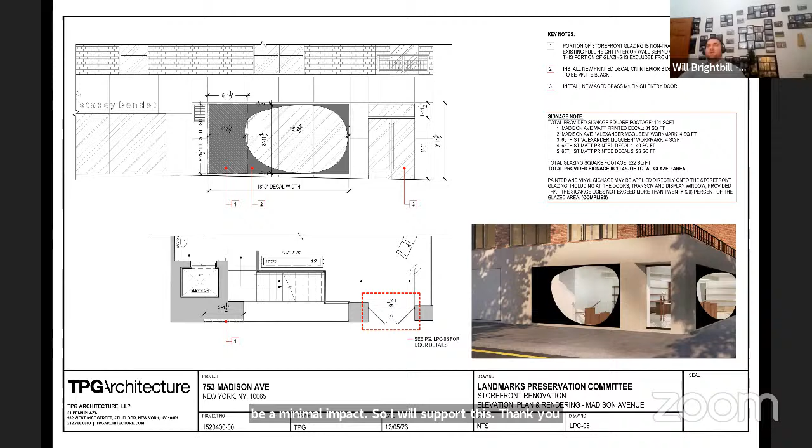Jane and David, well, I guess I'll go before David. It's hard for me to equate Alexander McQueen, a true giant in the world of fashion, to bring it down to product and branding. So I feel so sad that now we're associating Alexander McQueen with product and branding.

I will support the application. I think it's kind of unusual, and I admire the brand for coming forward to us with such an outre presentation. So I will fully support. Thank you very much.

I also will support it. It's a little bit unique, and I think that uniqueness gives some interest as you walk along Madison Avenue. And I think I would support it even if it weren't temporary, but certainly it is. So it's here for a year.

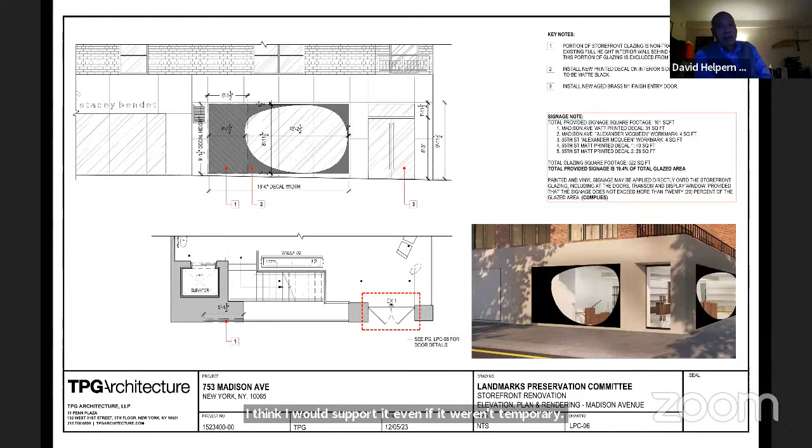So in any event, it sounds like we have a consensus and that we need a resolution. You have Marco and Gail with their hands up. Gail, go ahead. I move that we accept the presentation as presented. Seconded by Marco.